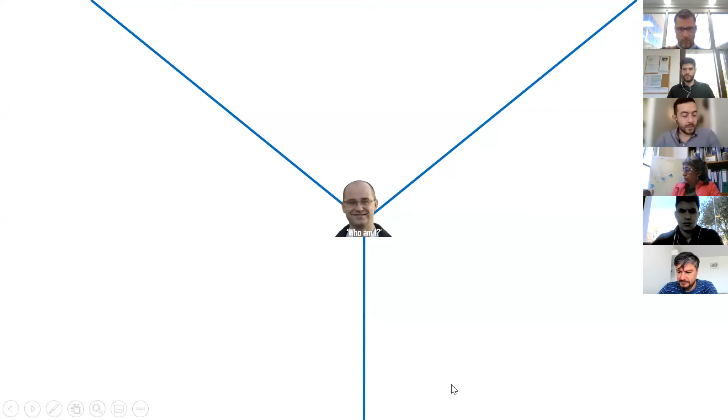I like to introduce myself basically by 3 components that always come back in my work experience. First of all, one of the main things that has always defined my career is that I'm trying to do research and science in support of decision-making in practice. This has actually been the topic of my own PhD work already, several years ago, but that has always stuck in my daily practice. While I'm addressing, at the moment, mostly ports and waterway related problems, there are 2 running components that seem to always come back.

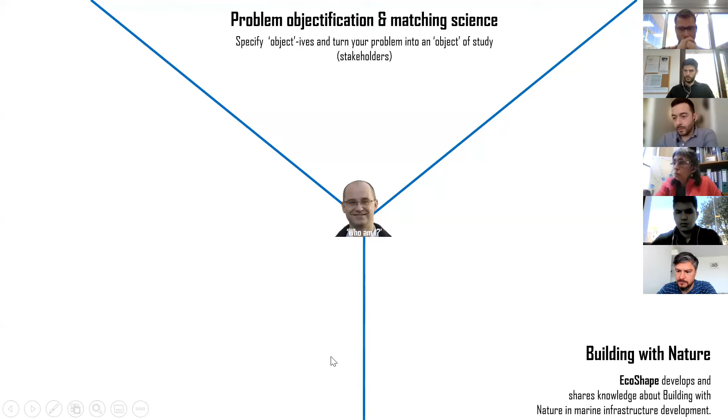One is, let's say, a sustainability part. I was heavily involved in the Netherlands in the Building with Nature program, where we look at promoting nature development around infrastructure projects. I've also been quite active in looking for introduction of digitalization and data science type problems into this. So to go back once more, my own PhD was on this topic, and there I developed a schematic way to match clearly defined problems with quantifiable quantities that you can actually quantify using data or with a simulation.

I'm hoping at the end of this lecture you will find that I still use this in my daily practice a lot. And if you look at Building with Nature, maybe you've seen some of these publications. We've worked on method development on how to integrate natural aspects into infrastructure development. But I've also been applying that myself, in the sense that I have worked on developing my own coral breeding laboratory, which may seem like a bit of an odd sidestep. And we've also worked on underwater microphones to keep marine fauna away from construction projects.

And when it comes to more the digitization part, I've worked on methods to actually introduce working with data, models and tools into the field of civil engineering, mainly also inspired by lots of field work that I did myself.

I was very happy to be awarded a National Science Award for that already a few years back. With that, I've really integrated also into my own group here at TU Delft. And recently I've been participating in two large pieces of literature.

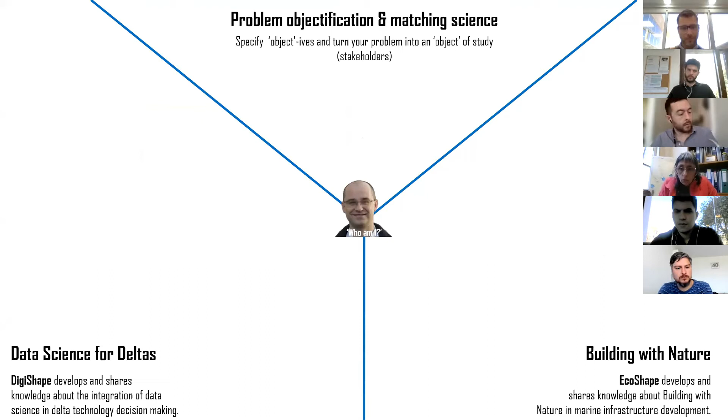Today, what's also quite important is that I am part-time employed by TU Delft as a professor of ports and waterways, as already mentioned, but I'm also still innovation manager at a dredging company, Van Oord. There I'm also busy with all sorts of supply chains over water. So those two different roles are quite well aligned, maybe only differing in scale.

For today, after this 5-minute introduction, I thought I'd spend the first block—I said about an hour, not entirely sure it will be exactly that, but we'll try to time it—introducing you to what TU Delft is doing on the topic of ports and waterways, what key aspects we've integrated into our teaching, illustrated with some master theses completed in the past year.

Then after a brief coffee break, the second block could take you along a few of our research topics. I thought I would illustrate some of the things we do by highlighting three different PhD studies that are currently ongoing in our group.

Then you will get to know our group a little bit, and hopefully by discussing these types of research, you'll also learn a bit about how you can approach the topics we've been addressing in these PhD topics.

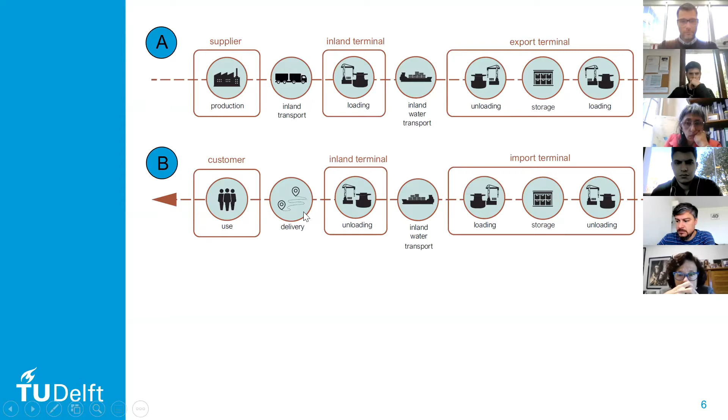There it might be unloaded and loaded onto a seagoing vessel, and then shipped for literally tens of thousands of kilometers to an import terminal where it's unloaded, stored again, maybe loaded again onto inland ships, and moved towards the end customer. This massive amount of trade moving around the world follows basically always a supply chain more or less like this.

And actually this supply chain is not running in free air, but it's based on a solid foundation of infrastructure. So here you see the same type of supply chain again, but from a factory towards either a seaport by road or via inland water transport. Then you have the seaport with long distance shipping, and the same at the end location, from the seaport to the end user location somewhere inland.

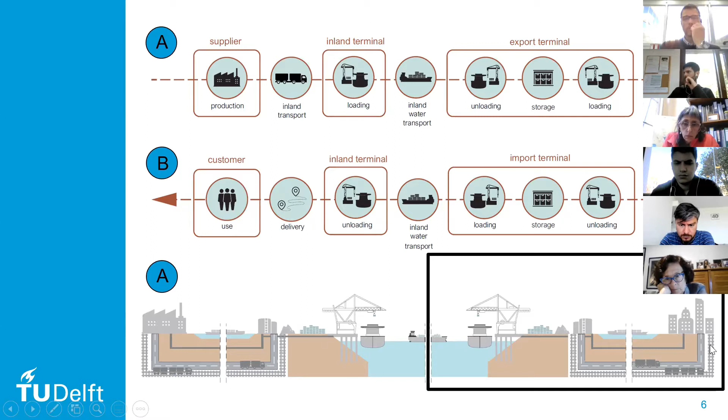Well, if we look at one half of this supply chain and we project it not sideways but more on top, then it could look something like this.

For some reason I have this bar here in front. I'm hoping you don't see that as well, but okay, let's continue.

So here you see the same end stretch of an international supply chain, where maybe from some overseas location A, the cargoes need to go to some city near location B. Large seagoing vessels approach a seaport and offload their cargo, and it goes either via pipeline, rail, road, or inland shipping towards this hinterland location where it ends up with the end user.

The large transport stretches overseas are very important, but they cannot really be influenced that much. It's the large vessels that create this liner trade between an export port and an import port, but the biggest difficulties actually occur when you are moving more inland. Suddenly you find that water depth, limited water depth, or the presence of locks and bridges will affect the efficiency of these supply chains very much.

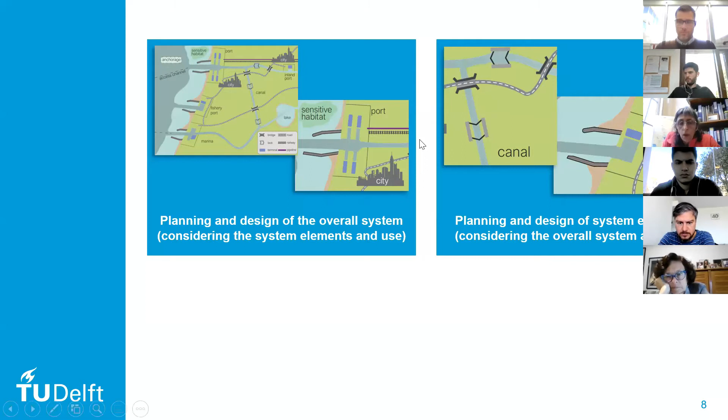So different scales are important, not just spatial scales, but also temporal scales. We look at the long term, where long term is so long that you can actually influence the system. You might be able to dredge a new channel, create a new terminal, or invest in a different fleet, and this is all possible, but it takes a lot of time to actually complete.

And we can look at short-term problems, where short-term is defined as so short that you cannot modify the infrastructure or the fleet composition. You just have to make the best of it with what you have. That typically means adaptation to new circumstances or traffic management interventions to handle new situations.

Next to the large scale and the smaller scale, the long term and the short term, it's also quite important that any port and waterways problems always have multiple stakeholders involved. So it's very important to find an optimal balance between the needs of those stakeholders. What is important from a terminal operator's perspective might be very inconvenient from a shipping captain's perspective.

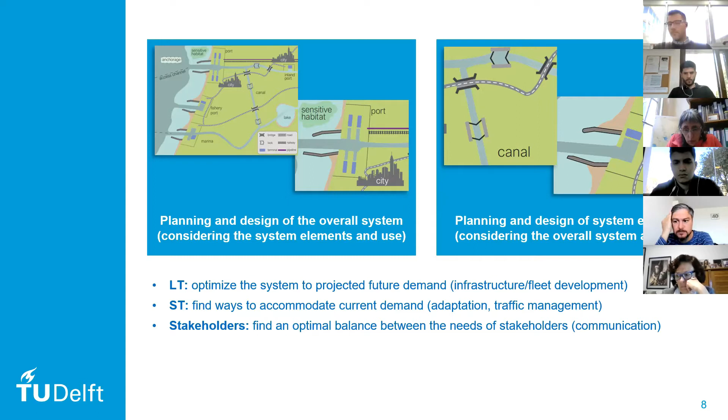To really understand what is the best solution for the system as a whole, you have to be able to show the effects of different interventions to different stakeholders so that you can come to an agreed conclusion. And these systems, you might think once designed there's nothing more to it, but these systems are always under development. In the past decades, we've seen big developments of increasing vessel sizes.

Typically in container transport, we've seen massive size increases. We see also developments in trade where new trade blocks are up and coming, or other trade routes emerge. Things like climate change start to affect these port and waterway systems. You see also an increased focus on sustainability. Some of that relates to climate change and emissions, but sustainability can also focus on natural habitats and so on. At least in Europe, it's becoming very prominent that you see the effects of the energy transition. People are looking for active investments in reducing energy consumption and footprints.

Things like digitalization, so the use of data and communication tools, is increasing, and you see things like autonomous vessels start to play a role. Basically all these things make it so that any port and waterway system is always somehow moving towards a new situation. This explains the title of this presentation and also the title of our book, Ports and Waterways, with the subtitle Navigating the Changing World. So basically how to anticipate and invest in being ready for the future. That's seemingly a never-ending process.

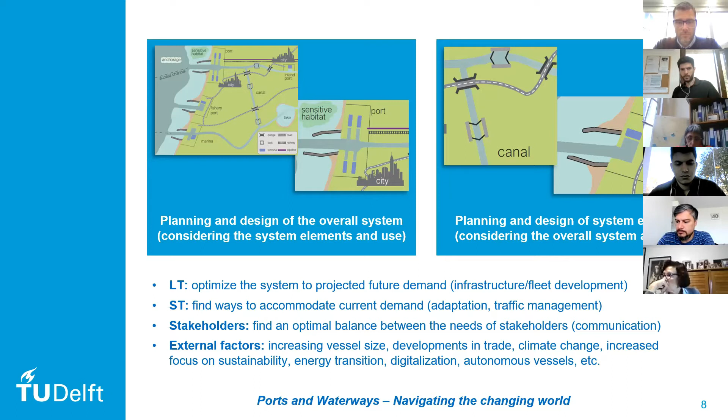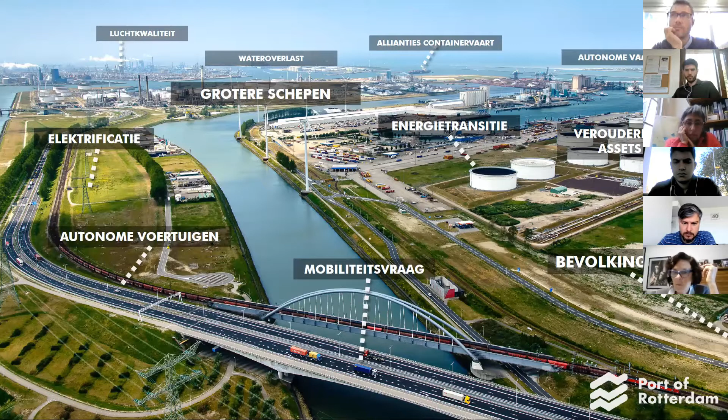So if we look at ports and waterways, what do we regard as ports and waterways issues? We look at the design of port and waterway systems as water infrastructure systems that support supply chains over water. We believe these systems are quite complex to manage because if you change something at one location, it might affect supply chains several tens or a hundred kilometers further in the network. So there's a very complex interaction of things ongoing.

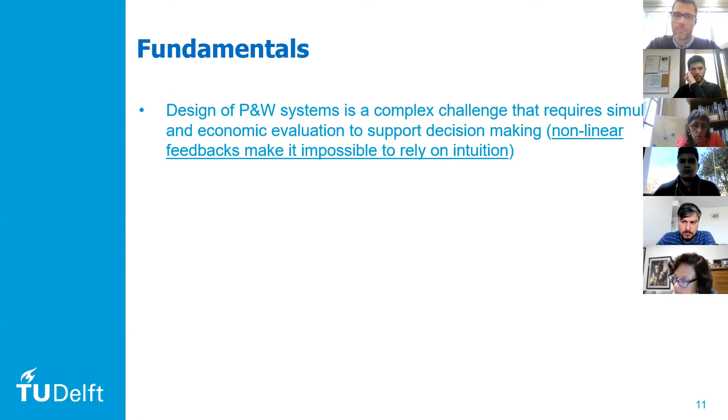To understand this requires simulation, but also economic evaluation. It's not just thinking of one way to improve the way the system works, there are numerous alternatives for improvement. What you probably want to do is understand the cost of certain alternatives, but also explain the benefits. Here again comes this link to all the stakeholders into play. What's also quite important is that many of these feedbacks that cascade through a system are typically non-linear, which makes it very hard to rely on intuition and guess what is going to happen. You really need to investigate to not be surprised. In that complex problem field, we as Ports and Waterways at TU Delft like to focus, as I mentioned, on water infrastructure design.

But to really be able to do that, you need to know about a few other disciplines. You need to know about nautical traffic, the movement of vessels, how they move over the network. But you also need to understand logistical processes, how many vessel movements are needed to get certain amounts of cargo from A to B, and if demand for a certain type of cargo increases, how many more vessel movements can you expect?

You also want to know about environmental and physical restrictions on your supply chain. These can be natural, like available water depth, a typical natural restriction to the performance of a supply chain. But there can also be man-made restrictions, like traffic management rules or environmental restrictions, which might also affect the performance of the supply chain.

Typically, we realize that to understand how these port and waterway systems work, we need to include engineering knowledge from different fields. It's not enough to look at it from a civil engineering or hydraulic engineering perspective. We also need to involve knowledge from, for example, the shipbuilding department to understand energy use, the production of sound or fine sediment spill, or forces exerted on a vessel or on quay wall infrastructure. So it's quite an integral field.

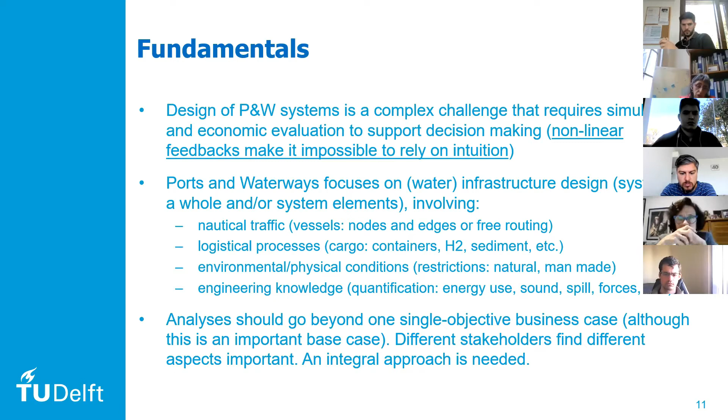And it's clear that we rely heavily for this on data and simulations to be able to quantify. So that brings me to, let me see, now it's moving up, that brings me to a next part of our education program.

We said, okay, it's so important for a ports and waterways engineer to understand that ports and waterways and all the things happening on it are part of an integrated system, that we thought, if we look back at our education material from a few years back, we had separate books and separate lecture notes for different elements. We had a separate book for ports and terminals, separate lecture notes for waterways, separate lecture notes for environmental effects, and separate lecture notes for system performance.

So we thought it would be so much better if we could somehow integrate it into one publication that discusses all these things in a well-balanced way. That's what we spent the past about 2 years of our time on. We spent a lot of effort to try and work out a book of that kind, and it has, as was mentioned by Pablo, been recently published via Delft Open Textbook.

I think you already received the link earlier, but you can just go to this link and download this book, and everything in it has been published under quite open licenses. So it's free for reuse as long as you attribute the original authors and don't use it for commercial purposes. Then it's basically free for you to use also in education programs and other things.

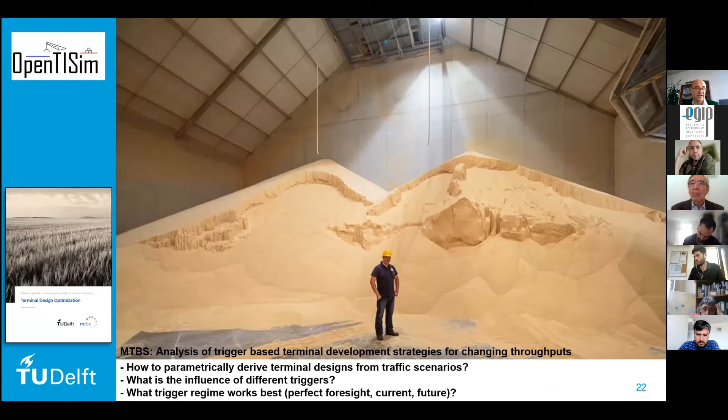So basically, just as I highlighted before, we take a certain supply chain into account. In this case, the topic was agri-bulk type of cargo, where vessels need to transport a certain amount of cargo. Then you can figure out, using all sorts of guidelines, how many quay walls you need, how much unloading equipment is required, and also how to transport from the quay to the storage facility, and from the storage facility to hinterland connections, etc.

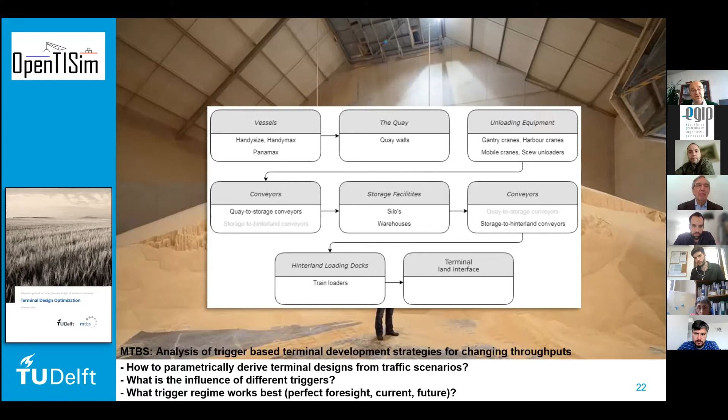So basically, to figure out what the total of such a supply chain over the terminal looks like, there's a bunch of guidelines available. And then we want to figure out how those investments, of course, start at T0, but then also how they can be influenced over time.

So you get a certain terminal at T0, and then if demand increases, there comes a point when certain triggers maybe require you to construct a new quay wall with new unloading equipment, or increased storage facilities, or increase the hinterland connections, and so on. All these investments further down the line influence the cost profile of such a terminal.

So hopefully by having these investments in place, your revenues might also increase. And then if you calculate back what the present value of all those cash flows is, you can get an idea of whether or not this terminal is profitable for a certain demand scenario.

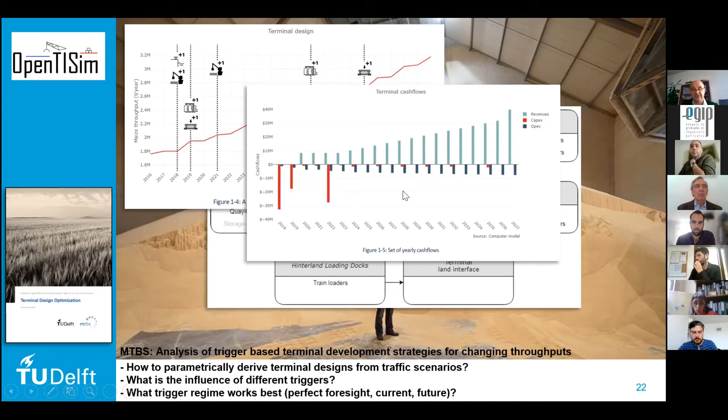And the nice part of integrating this into such a package is that if you can do one calculation, you can do a hundred calculations, if you will, for example varying thresholds of service levels. This way you can explore how different scenarios might lead to different business cases. Well, this is one tool that we have.

Another one is related to what we call Open CLSIM, that's related to complex logistics. In this case, we have cargo that needs to go from A to B, which governs how many vessel movements are actually going back and forth.

And this has been applied, among others, on issues related to low water levels on our main rivers. If you look at the port of Rotterdam, it serves typically a large hinterland with Duisburg as one of our main back ends, but actually further down all the way to Basel, cargo is being transported. One of the things that happened in 2018 was that there was very little rain and water levels dropped dramatically.

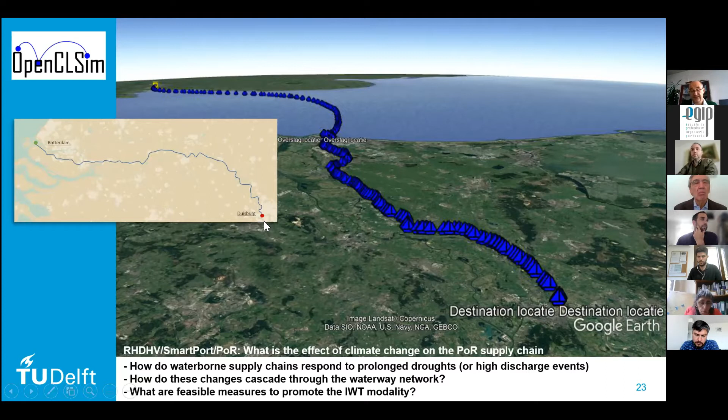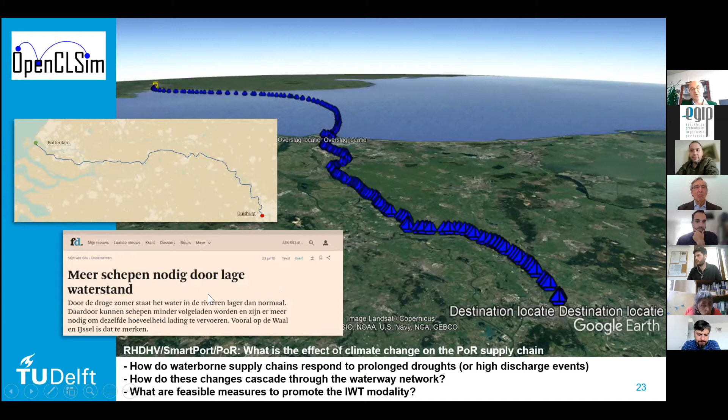As a result, we got news items like this — it's in Dutch, so I'll translate. The news items said that the water levels are low and now more and more vessels are needed. So this is typical interaction between the state of the river and how the supply chain needs to operate.

For that purpose, we developed a digital twin to analyze inland water transport corridors. Later this week, Fedor Baart will hopefully introduce you to this particular digital twin in more detail. But I will just show you some of the things that we looked for in that.

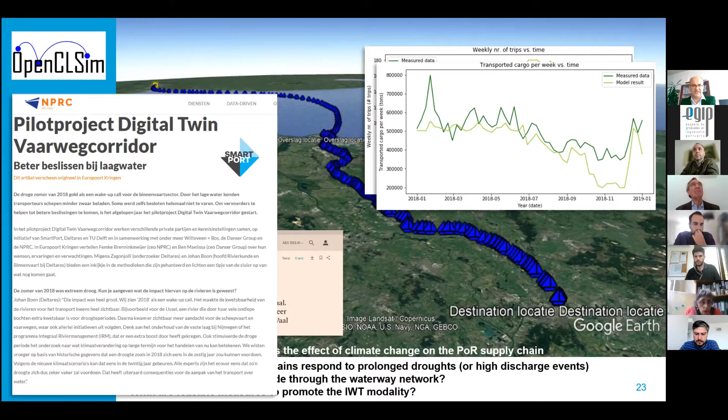We looked at this Rotterdam-Basel route for a given shipping company, and wanted to figure out how many vessel movements were needed to move a certain amount of cargo from A to B. Then with OpenCLSIM, you can run a planning like here.

You see that there is a number of vessels that perform a number of activities. They need to go to the port to be loaded up, so all these are loading actions, and then they are sailing full towards the destination. They are unloaded again, and then they need to sail back and load it again, and so on.

But if you would have less water going down the river—Lobith is here, this entry point in the Netherlands—and if there's less discharge, then the water levels on the river will be lower. With lesser discharge, the vessels cannot load as much cargo as before, so they need a few more trips at the end, and as a result the project becomes almost a day and a half longer.

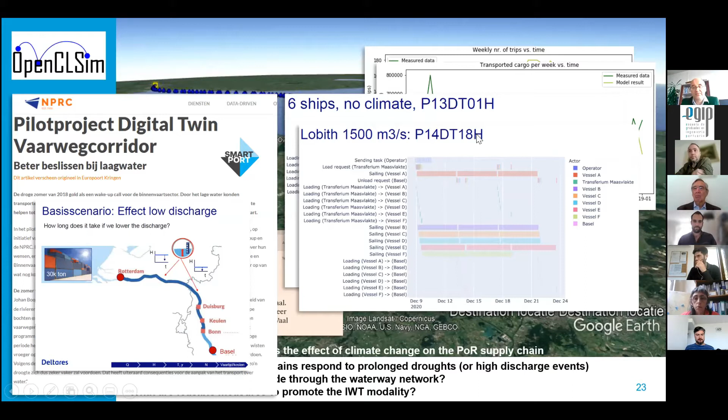If you further reduce the discharge, even less cargo can be taken on board, and the project needs even more vessel movements and takes even more time. So if you do that for a whole bunch of discharges, you can investigate how, with declining discharges, the time needed to transport 30,000 tons of cargo sort of escalates. This is a typical non-linear relationship—as the water level in the river drops, the performance of this supply chain increasingly deteriorates. That's what you want to understand to be able to advise shipping companies or port operators how they should adapt their activities.

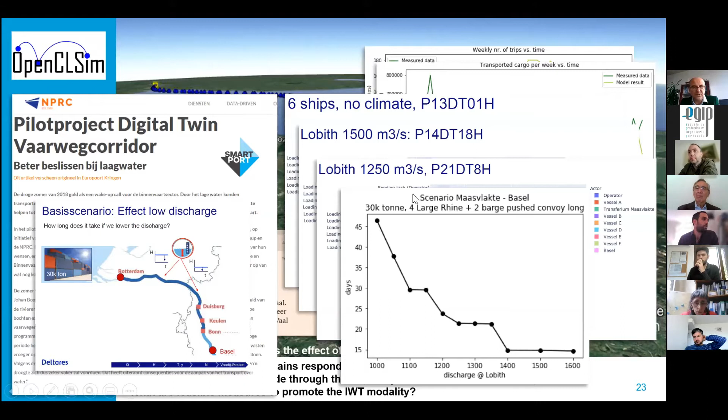Well, a similar type of tool is called OpenTNSim. That's focusing on transport network performance, and whereas OpenCLSIM is driven by cargo transport demand, OpenTNSim is much more driven by actual origins and destinations provided by the user. Then you can let vessels move over a certain transport network, and as they move, you can calculate interesting things.

In this case, we had a student who was looking at estimating emissions or energy consumption from moving vessels. We integrated knowledge on resistance calculations for vessels, based on ship dimensions, sailing speed, and fairway properties, and then you could calculate resistance.

If you know what resistance you need to overcome for a certain speed, you can estimate how much power is needed. If you know for how much time you need that power, you can estimate the total energy. And if you know the total energy requirement of a trip, you can use things like engine age, partial engine load, and emission factors to translate this energy consumption into fuel consumption and actual emissions.

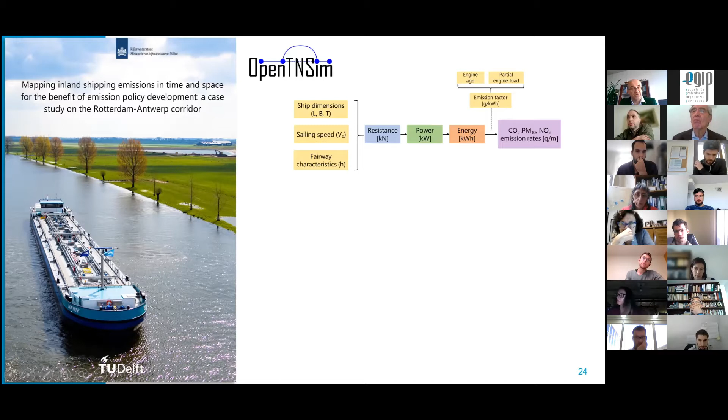We applied that starting with AIS data. AIS data is automatic logging of large cargo vessels to log their position, so you know their position in space and time, and from that you can derive things like speed. If you have that information and know something about the vessel dimensions and waterway properties, you can perform these calculations and come up with emission maps.

If you have these emission maps for the AIS data, which represents an actual situation, you can also implement it in this tool to test different policies. One test was to see: if we have a certain fleet operating on these waterways, what if we replace all engines older than 2007 with new engines? That requires an investment, but what could be the emission gain?

Those are the things that we try to analyze and quantify, and then you get these kinds of numbers back. After the coffee break, I will go into this particular topic in a bit more detail.

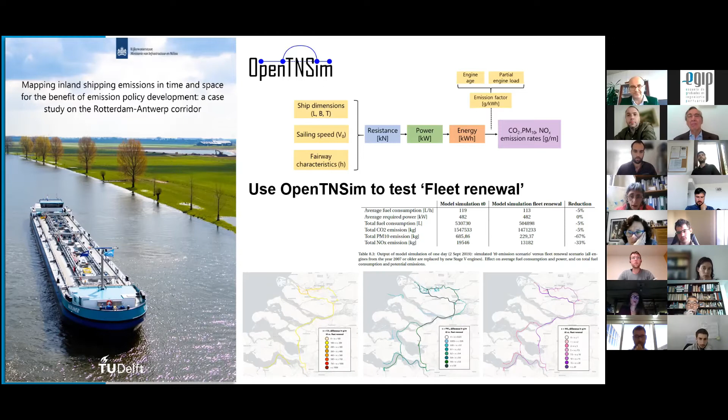The previous tools I described were related to terminal development and vessel movement on the network. A very modern and interesting topic nowadays, in light of the energy transition, is: what if we wanted to import large amounts of hydrogen to a port? How could you analyze the performance of such a supply chain? What's interesting about hydrogen is that it's transported in different forms - different carrier types. You can transport it liquefied if it's really cold, in gaseous form, or attached to a certain carrier. Whichever way of transport you choose, it will affect your total supply chain.

If you have hydrogen in a certain form, you may need to include reconversion plants at some locations. In this study, we tried to figure out the configuration of these supply chains, including things like demand - if demand increases, you get economies of scale - and how distance affects which is the best option. Looking at supply chains from an export terminal to an import terminal to an end user, we applied OpenTISIM for the terminal location and OpenCLSIM for the transport, and for the terminal again, for the transport, and for the terminal again. This way we could quantify how different designs and configurations translate to cost per ton of hydrogen, mapping out different locations and distances to compare supply chains.

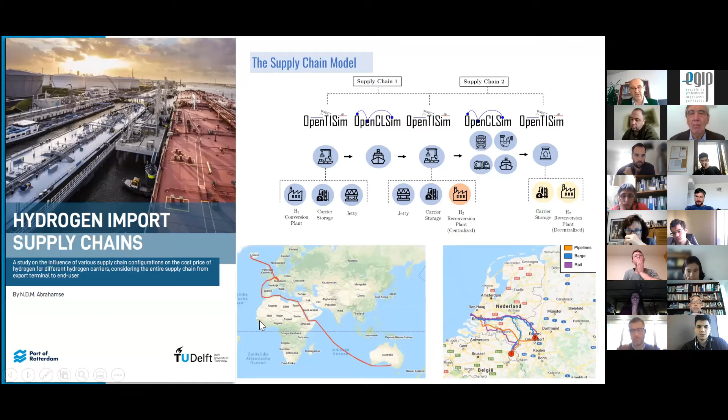That's an interesting overview of some tools we've developed to look at these waterborne supply chains. To move towards a conclusion, for this first hour I thought I'd discuss briefly how we applied this kind of analysis to look at the emission performance of different dredging projects.

If you regard a dredging project as a miniature supply chain, it's also moving sediment from A to B with vessels over a certain route - quite comparable to moving containers over a much longer distance, but simpler in scope. To explain how we analyze such supply chains, I'd like to take the case of Dutch coastal maintenance, safeguarding our low-lying country from rising sea levels and storms.

Every year we apply 12 million cubic meters of sand to the Dutch beaches through dredging operations. This can be done near the coast either by a process called rainbowing, where you jet the water-sand mixture over several tens of meters, or by bottom door dumping - I didn't include a picture of it because it wouldn't show very well. Or you could pump the material via a nearshore pipeline to the coast, where it then had to be reprofiled by land-based equipment into the proper profile.

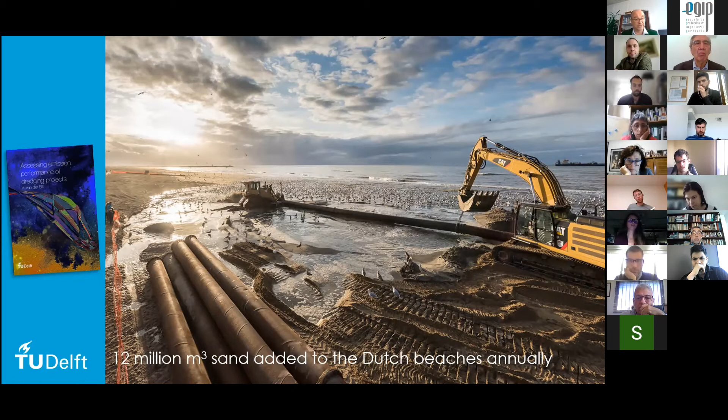One question that came about in the Netherlands, also in light of the Paris Climate Agreement, was: what is the energy consumption pattern and footprint of these projects, and what is possible in reducing these footprints? That's what this student was focused on.

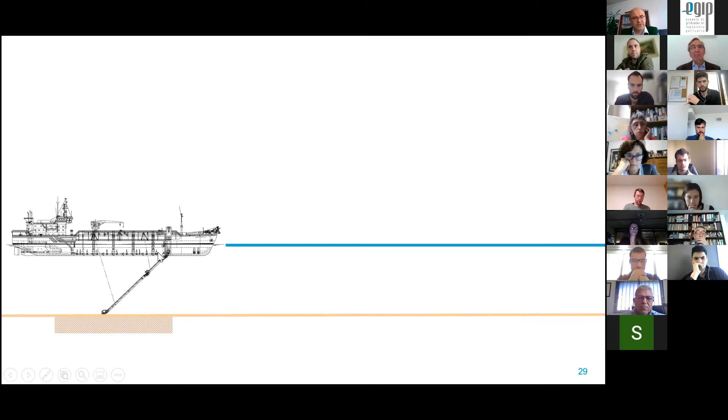The way we did that was we simulated - we decomposed a dredging operation into a series of discrete events, separated events where you can estimate the time of each. With the tools we've developed, this allows a basic agent-based simulation. If you look at a dredging process, the first step is a trailing suction hopper dredger with a suction arm trying to pick up sediment from the seabed, taking material on board, raising the suction arm, then sailing toward a certain location near shore, where at some point it cannot approach further due to restricted water depth.

Then it needs to pick from a few options available for releasing the material. One option is what we call in the Netherlands shoreface nourishment, where we basically place the material by bottom door placement on the shore face. But there is also an alternative: beach nourishment, where you really want the material on the beach.

Well, then typically you would need a floating pipeline to actually get that material to the beach, where you can then reprofile it with land-based equipment. But pushing through a pipeline requires much more energy than just opening the bottom doors. So what ways are there to calculate the energy consumption?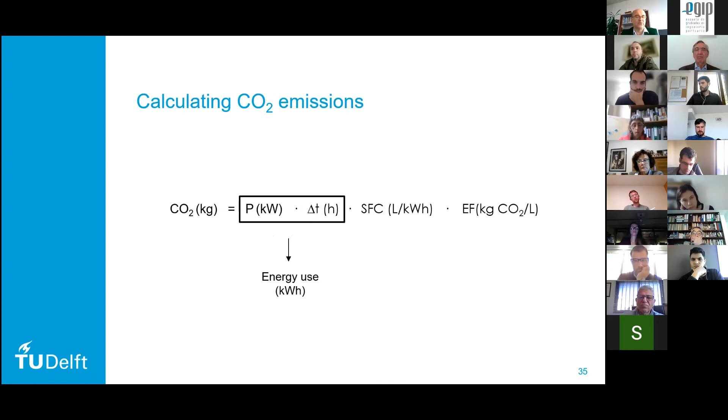Basically, almost any marine energy estimate calculation follows quite a similar route. Step one is that you want to understand how much power is required for different phases of this particular process, and also how long this power is applied. If you know this for each phase, you can estimate the energy use of an individual discrete event. If you understand the energy use, you can translate it to the required fuel needed to deliver this energy. And if you know how much fuel is needed, you can use emission factors to estimate the amount of CO2 present in this fuel that is being consumed.

So this is actually quite a common way to estimate emission footprints of all sorts of nautical traffic. After the coffee break, I will go into a little bit more detail for inland shipping on how we have a PhD who's looking at this. But what is peculiar of dredging projects is that actually a lot of power goes into the dredging and placement phases, so that's why I've decided to highlight it for now.

So if you want to estimate these different energy consumptions, it helps to look at different phases, or first at the different power sources that are on board.

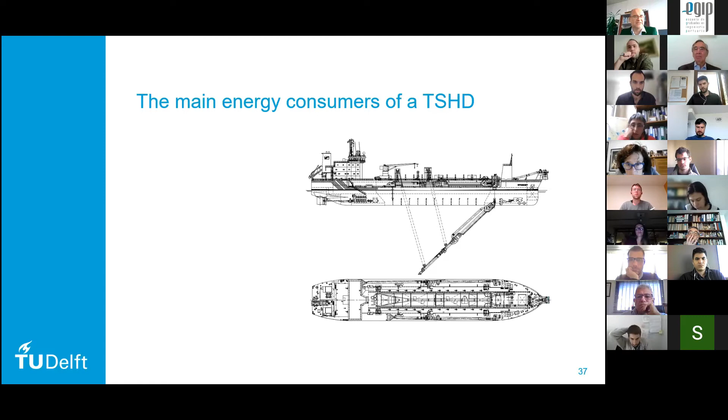So if you look at a hopper dredger, you can identify dredge pumps that are needed to create vacuums and suck the material from the seabed to get it into the hopper on board. You probably will need propellers to navigate the vessel, either sailing full or sailing empty, but also during trailing, where you want a certain speed forward. You need jet pumps to jet water into the soil to release the material so it can more easily be picked up. And you need bow thrusters to do more detailed positioning.

So if you have a vessel that needs to connect to a floating pipeline, you need to make sure it stays in position. And you have the more regular board net or hotel power, basically the power that is almost always on for the lights and navigation and so on. So these components form the energy consumption of a trailing suction hopper dredger.

So it will be interesting to look at these different phases or discrete events, to see which of these sources are actually used. If you look at the dredging phase, then you see that all these sources of energy consumption are basically being used, except for maybe the bow thrusters.

But if you go to the sailing phase, you typically will only have the propellers operating to create sufficient forward speed, and of course the board net, because that's always on. Then if you look at placement, you might need your dredging pumps again, and your jet pumps to get the material off board, and maybe also the bow thrusters to stay well positioned at the floating pipeline. And if you sail back again empty, it's mainly propellers.

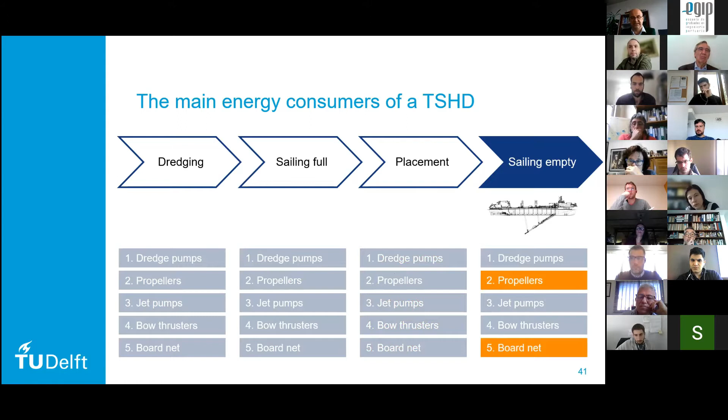So if you know these sources, there are ways to estimate the amount of energy that this requires. For this presentation, it takes a little bit too much to go into those algorithms in detail, but I'm hoping that you trust me that these algorithms can be developed. And then...

You can go and look at different strategies for emission reduction. So which elements are in play? It's interesting to distinguish a number of aspects.

First of all, there's things that relate to the project at hand, so there might be things peculiar to a certain project that trigger a certain energy consumption. There might be policy measures, things in the context of the project established by a local government or so to restrict what you're allowed to do. And then there are operational aspects, things that a vessel operator can control, or a project manager can control, to change the way his project is executed. So typically those first two elements, you could view them as restrictions - they box off the playing field.

So what is given is defined by these aspects, and the operational aspects are the freedom you still have to play around within this playing field and try to optimize.

For these last few minutes before the coffee break, we'll first focus on the operational aspects, typically the selection of work method and maybe the way you operate the equipment. Then we'll briefly discuss project aspects, and hopefully I can show you that these different perspectives should always be viewed together to come up with the most ideal solution. But let's start with operational aspects.

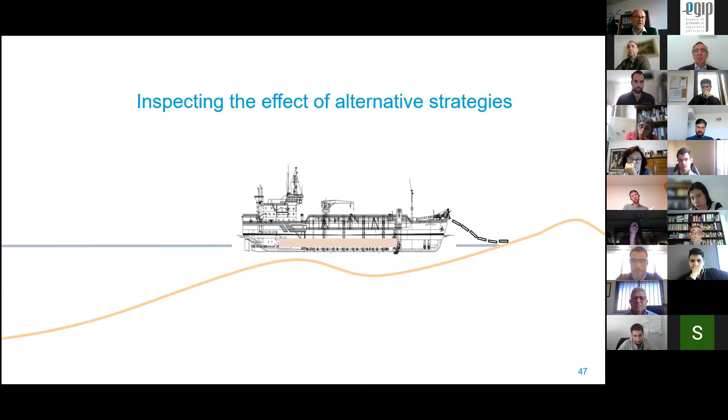An alternative would be to mobilize a different piece of equipment altogether, say a smaller vessel, which can already sail easily closer to shore. But of course, this will require many more trips. So which of these options is better than the other? That's something you want to actually calculate.

So for that, we did a case study - or I must say the student did a case study - looking at a project for beach nourishment by a single hopper, dredging a little over 1 million cubic meters of sediment. It had a site on the beach, a dredging site about 15 kilometers away and more offshore, and a connection point about 2 kilometers offshore of this beach nourishment position.

If you calculate using all these algorithms, which I won't go into the greatest detail about but hopefully you can take my word that you can calculate this, then for each individual discrete event - like loading, unloading, sailing full, sailing empty - you can calculate the energy required. If you aggregate those, you see that a project like this, a little over 1 million cubic meters of sand, will take about 31 days to complete and produce about 5 kilotons of CO2.

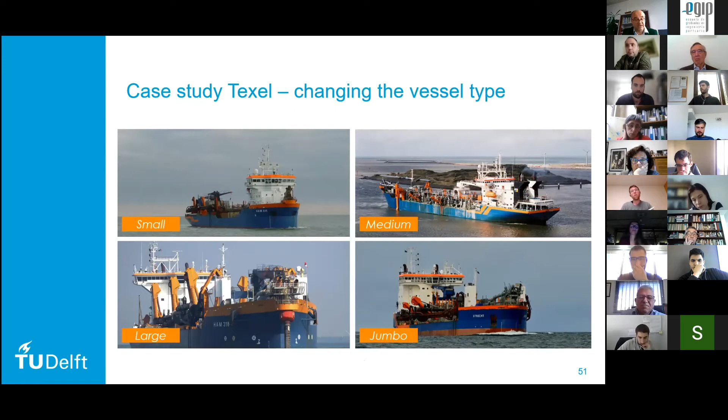Well, then you might want to play with different types of vessels - a small, a large, a medium, or a jumbo type hopper. The larger the hopper, it might require less trips, but it will only be able to approach the shore from a greater distance. So how will this trade off?

But if you look at the CO2 associated with it, you see that it might actually have a larger footprint, mainly due to the fact that it requires a lot of pumping through the pipeline. So depending on what you want to achieve with your project - whether the cheapest project, the smallest CO2 footprint, or anything in between - you come into a trade-off situation.

So also in that way, selection of equipment can be really important. Well, then other things that you can do on the project is changing the vessel speed, for example. So in this case, we are changing only the speed, sailing filled or sailing empty.

Then you see that, and probably you know, if you look at the resistance a vessel is experiencing, the larger the speed is, the larger the resistance is going to be. So this larger resistance requires more fuel and thus a greater CO2 footprint. So you see speed causes an increase in the footprint.

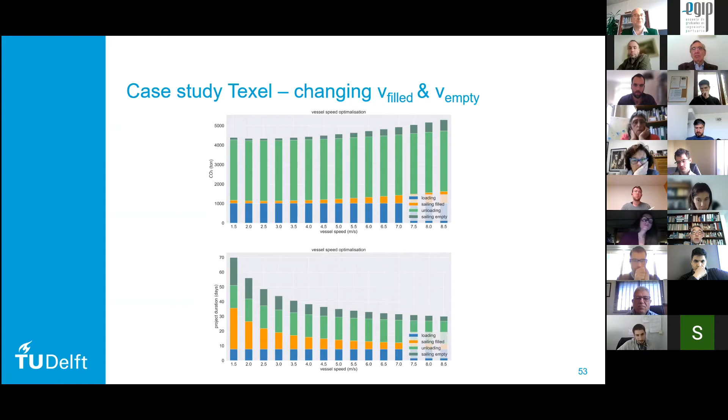So if we then take the reference case again as a start, you can look at a smaller vessel that already can reduce the footprint quite significantly. Mainly if you look at these bar graphs, because it can approach the shore closer, it will have a smaller distance to pump. So that affects the totals of this particular example significantly.

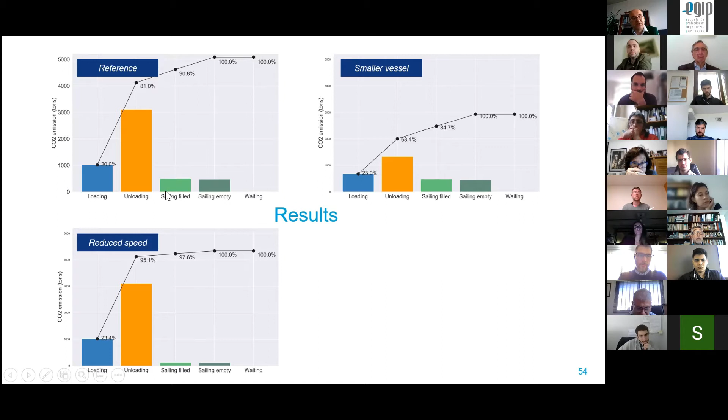But then if you play with the speed, you see the speed reduction from the base case is not extreme. You see it mainly in the sailing filled and sailing empty. These were already not the largest contributors to the overall footprint, so a reduction in those has only a limited effect.

But if you then combine both, and compare to the original reference case, you can achieve a reduction of about 50% in CO2 emissions. But you will probably pay for that with a much longer and more expensive project, right? But this is what you want to be able to trade off.

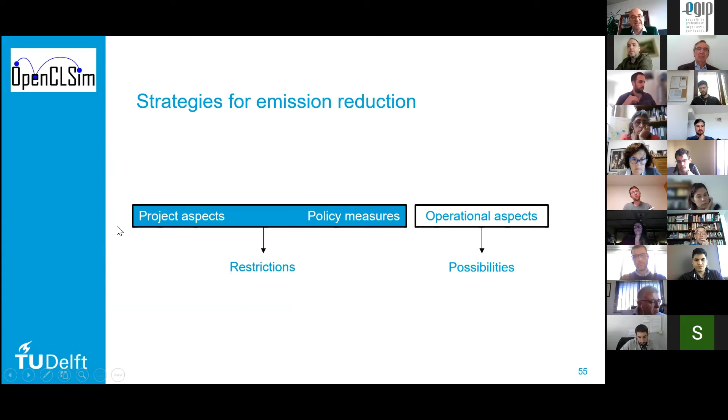Well, then we go to the other section of this problem, and that is if you look at what can, let's say, the project proponent or the government maybe do. So can they change some of the restrictions perhaps?

If we look into that, it's interesting to note that the location of this offshore sand mining location is by law required to be outside of the -20-meter depth contour. This is because the Dutch government is trying to keep the Netherlands strong against sea level rise. So it would be quite counterproductive if people would be mining sediment basically in the foundation of our country. That's why they said the edge of our foundation is located at this -20 place.

So this is a very sensible thing to do, but you could maybe also wonder, is -20 the holy number, or could -15 also be an alternative? I'm not saying that one or the other is true, just that if you want to investigate, you could do that by modifying this dredging location. Let's assume you could take a location around -15 rather than the -20. Then the mining location would become much nearer by, so your sailing distance would be reduced.

Another thing you might do is that for this particular project, it was desired or required to actually do a beach nourishment, so you had to implement this floating pipeline. But what if you could allow application of sediment just near the beach, in the coastal profile rather than actually on the beach? In that case, you would eliminate this energy-consuming transport to the pipeline, and you could place the material in front of the outer bar, for example.

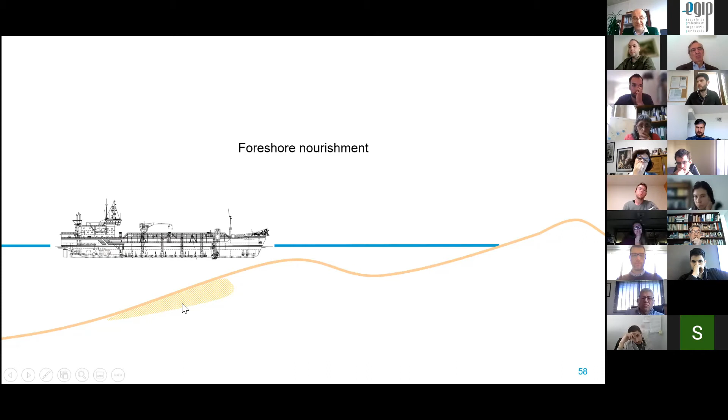If you look at this picture again, you would see that the offshore mining location might come closer by, and maybe you could eliminate the pumping towards the beach. And then how would that translate to results? Interesting to see. If on the one hand we had the operational elements that we could do, that could save about 50%, but would be paid for by a very much extension in project duration. Well, the other part of the equation is to maybe be flexible on some of these items in the project, and that can also have a significant reduction in emission footprint.

And in this case, not at too large an extension of the project. The point I'm trying to make is that to fully understand this particular problem and where there's room for improvement, you need to take an integral view of it and quantify how different alternatives work individually, but also together, so you can find the most optimal combination.

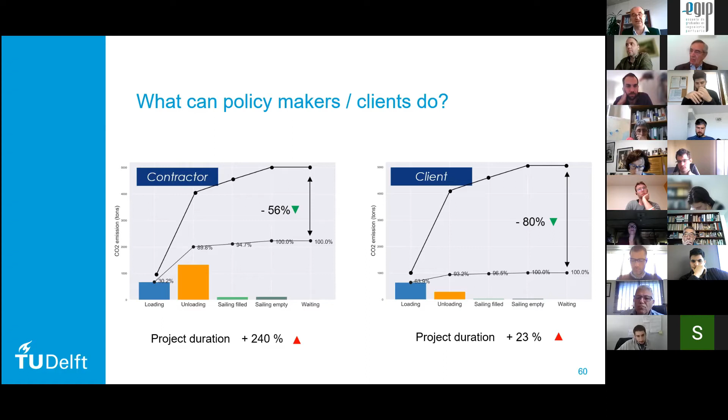So this sort of summarizes that once more. You can see that contractors might modify their work methods in the short term, or invest in new vessels with different types of fuel. They could do that. But clients should also be aware of what they can do with their regulations and restrictions.

Every restriction you impose might trigger or limit certain solutions that could be beneficial. So it would help to discuss this together to figure out the best way to address emission reduction. That can be achieved on board with different fuels, different engines, scrubbers, but also in the projects and even in the policies.

The whole point, from our ports and waterways perspective, is that what we try to do as a university is enable people to calculate all these different components and really study how those trade-offs operate in practice. So with that, I am exactly one hour underway.

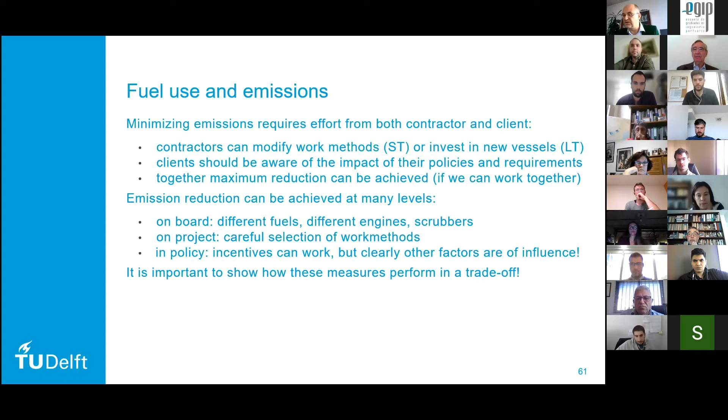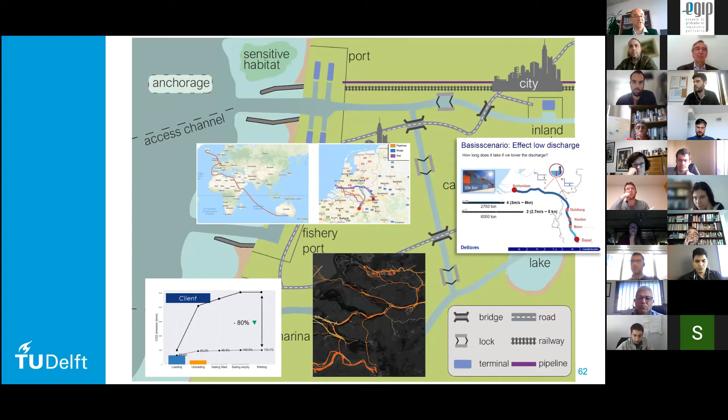This is a perfect moment for a break, but let me briefly sum it up with this overview picture once more. I was hoping you saw that topics like the hydrogen supply chain, the shallow water effects, the emission footprints on the network, or the trade-off in dredging strategies might seem like different elements altogether, but they are all somehow related to supply chains that operate on water, and we see a very common approach in all these problems.

That's why we have developed tools like we did to analyze those. With this, I'm concluding my first hour, where I hope to introduce you into ports and waterways the way we view it at TU Delft, and how that actually materializes in some of these research topics.

After the coffee break, which we'll have to negotiate in a bit how long we take for that, I would like to introduce you to 3 PhD topics that we are currently working on, diving into some of the topics I already addressed, maybe with a little more detail. Then you will know what kind of research we are doing, and hopefully you'll learn a little about those topics along the way.

So with that, Pablo, I'd like to finalize this first hour. Perfect, what is a good moment to reconvene? How long will we take? What do you prefer, Mark? 5 minutes, 10 minutes? Maybe we can do 10 minutes, and people can refresh, grab a cup of coffee. So we would reconvene in 10 minutes, right? So 10 to the half hour. Exactly. Well, thank you, Mark, for this very interesting first lecture, and see you in 10 minutes, all of you. Please stay in the meeting hall or on YouTube, just to keep following us. Yes, thanks. Okay, see you in 10 minutes.

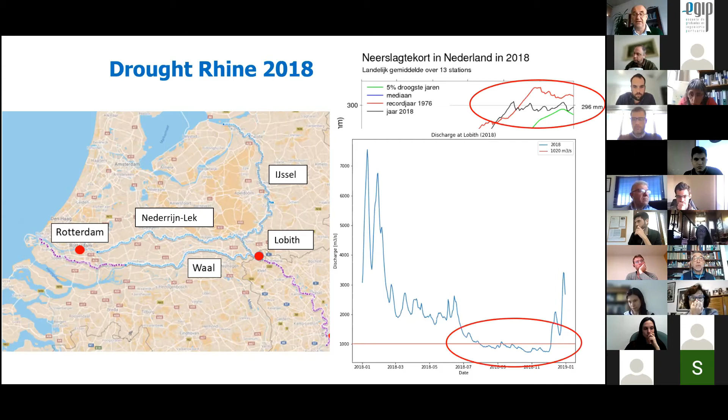At the same time, something happened only a few weeks ago, just before the summer holiday, in July here in the Netherlands. In the normal summer period, which is usually a bit more dry, all of a sudden a massive rainstorm developed, covering not only the Netherlands but also large parts of Germany, France and Switzerland. So much rain fell in such a short period of time that it caused a massive increase in discharge.

That looks like this if you look at the discharge graph. After this rain event, for a few days, the discharges on rivers in the south of the Netherlands increased to levels we would normally only see in winter, and only very rarely, then it took a few days to die off. So compared to the drought, this was a much shorter period of time, but still quite an extreme increase and decrease of discharge due to a massive rain event, which we probably also associate with changing climate. We expect this kind of event to occur more frequently.

If you look at newspaper articles - they're in Dutch but I'll translate - during the drought you saw pictures like this, where the water had receded quite drastically, with very limited underkeel clearance. And here we see that construction raw materials became much more expensive.

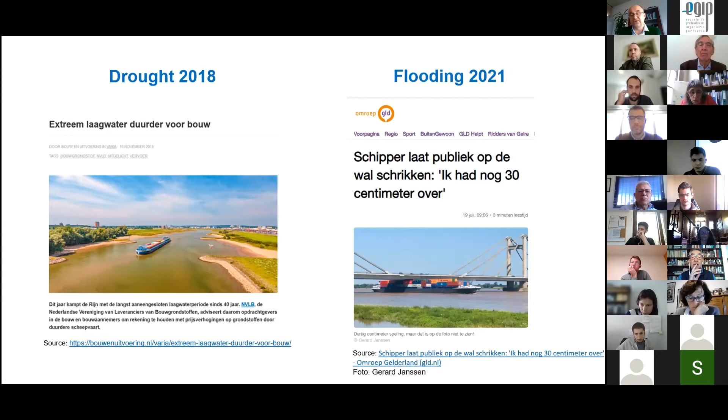But for high water, typically you see that the air draft, the distance between a fixed bridge and the water level, becomes a problem. In both cases, either too little water, so the draft is an issue, or too much water, the air draft becomes an issue. It's still interesting to figure out how those occurrences will affect the transport supply chain.

So for that, this PhD student is looking at how he can relate the status of rivers under the influence of changes in discharge scenarios, and how he can translate that to changes in depth, width, and height, and how that will then affect performance indicators of the supply chains. A number of performance indicators are the number of trips, the total transported volume, and something related to cost.

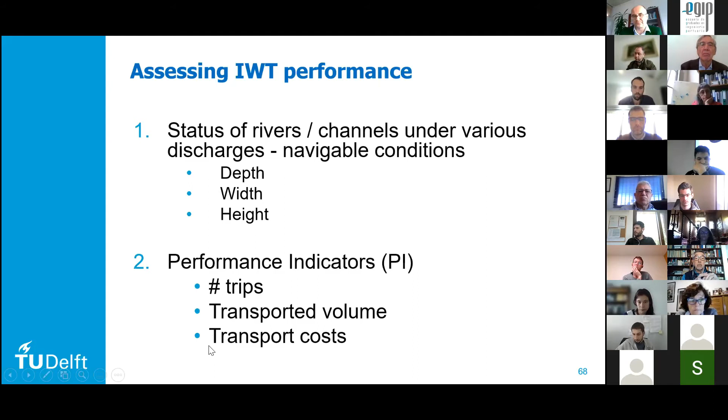So if you look at the effects of discharges on depth and air draft, here you see a schematization. If you would normally have a river cross section, it would have a certain profile. Probably you want to understand how, at a certain water depth which can still be navigated, what the width of the channel is, to know if, say, two vessels can still pass each other, and if there's not enough space, maybe cargo needs to be offloaded to become shallower. That's one of the things we want to understand.

In Delft, we do a lot with hydrodynamic modeling. One of the models we use a lot is, for example, SOBEK, which is a 1D water transport model. It typically solves the 1D shallow water equations integrated in width and depth, but it also has information about the river cross-section all along the river schematization. So if you have a SOBEK schematization of a river, you can know the changes in the water levels, and then with these profiles, you can translate it to available water depth and channel width.

At the same time, you can imagine that if the water level increases and you have fixed bridges, you're interested in the distance between the under part of the bridge and what will be the effect on the maximum loading capacity. So what could happen is that a vessel needs to load fewer containers, maybe remove one layer, to be able to fit under the bridge. Those are aspects of how changes in the water system will affect the performance of the supply chain.

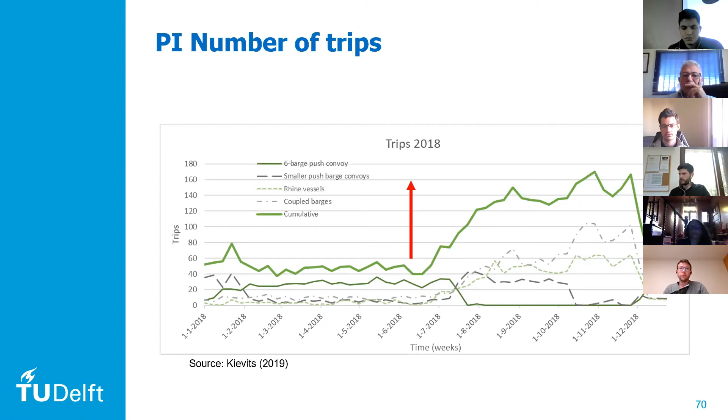The other part that you can get from these counting points is the total amount of transported cargo. For dry bulk, we could see that even though over this period the number of trips would increase, there were more trips with less cargo, and when all summed together, the maximum transport capacity still reduced for this particular type of cargo.

If we translate this to cost, we can see there are massive impacts on transport costs. There were also news messages where, for example, in the German hinterland, steel manufacturers complained about losing fuels and raw materials for their factories. Industry suffered an estimated 4.7 billion euros of production losses, so that's a serious impact.

There are different estimates of what cost should be associated with a drought in the Netherlands in this case. You can imagine these droughts can have quite a big economic impact, and that could warrant the government to look at different ways to intervene. So how can they make the system more robust to climate change?

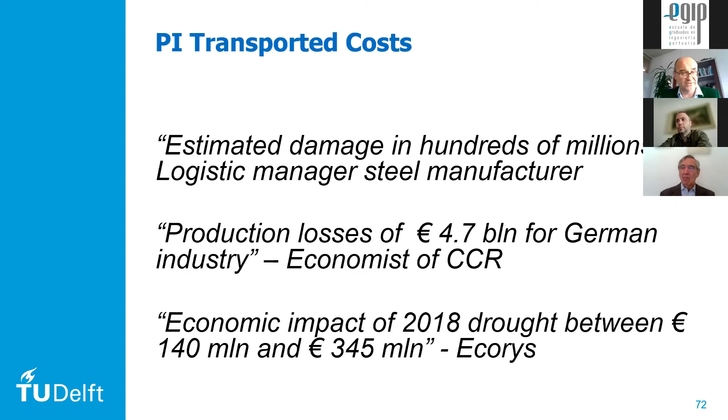For this we used, among others, our OpenCLSIM model to try and reproduce these observations. One of the things we try to do is estimate the transported volume per week and estimate the total number of trips over time. There you see a few discrepancies between what the model says and what was observed.

For example, we anticipate in our model that less cargo is being transported during very low water levels. This can be explained by the fact that we have implemented triggers for reduced loading in our model, which are basically fixed underkeel clearances, like 30 centimeters for sandy bottoms and 20 or 30 centimeters for harder bottoms.

But in practice we see that captains try to load a little bit more than this level, because they believe that by knowing more details about the river, they can find a path that is still navigable. So even though the model says no more cargo can be transported, in practice people become inventive and take more risk or find ways to still navigate the system.

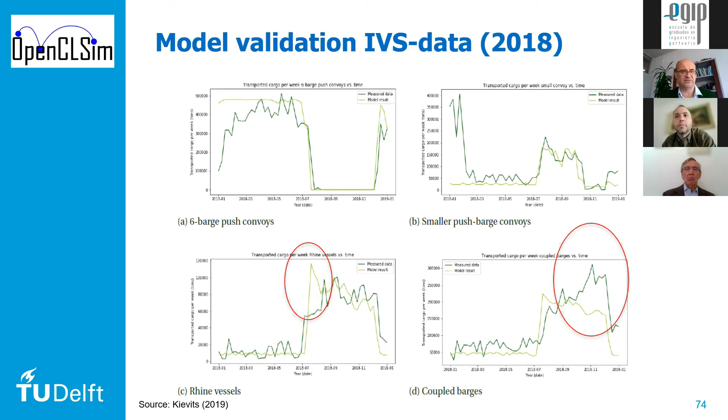So we have a good idea that if we can simulate different discharge scenarios on our river system, we can translate that to how the fleet will change and adapt, and how that translates to more trips or cargo transport. With that, we'll have a tool in hand that allows us to compare different measures, different interventions the government could take to improve the situation.

What kind of things are people thinking of? Well, there's a range of things. You can imagine that if the number of droughts becomes too big, maybe we need to look for ways to regulate the river by creating weirs in the system to have more water depth available, or maybe create side channels.

These would allow for the passing of the lock, but there will be more water available, hopefully, so it might be good for the supply chain. Or shore-parallel dams, that hopefully can keep a greater water depth in the river even with lower discharges. Another option is dredging, to remove possibly a number of bottlenecks in the system. But all these interventions require quite substantial investments, so you need to figure out if it's going to be worth it.

But there are also measures you can think of in the logistics chain. Maybe you can change the sailing regime, so there are more moments in the day where you can fit more trips, if that's still possible. You could also think of possibilities to increase stockpiling - if you can anticipate a period of drought coming, you can transport a little bit more in advance so you have a stockpile as a buffer for the drier periods.

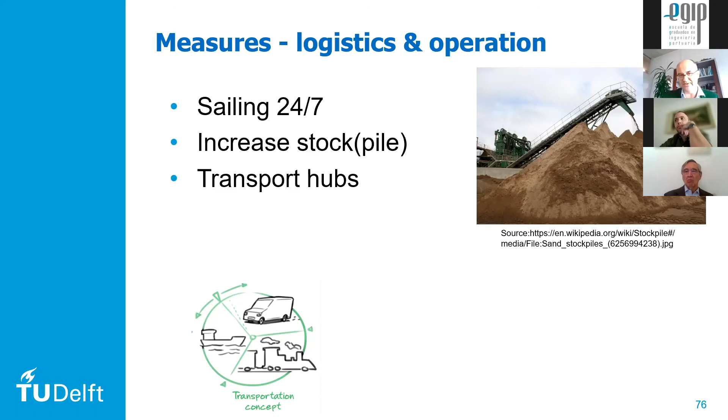Yet another measure is modifications to the vessels. You can apply buoyancy devices next to the vessel so it becomes higher in the water column, or look at ways to reduce the lowest point of a vessel. Typically the propeller and the tube around it can be limiting factors for maximum depth, and some people are looking into different vessel shapes that might perform better at these low discharge situations.

But it's good to remember that even though a vessel might perform better in the extreme situation, it's still a question mark how it will perform during normal situations. So that's again a trade-off you want to investigate.

A final measure you can take is to invest in information services - maybe better riverbed predictions or riverbed datasets that allow captains to have a better idea of how much cargo they can load, predict water levels further in time than we do now, etc.

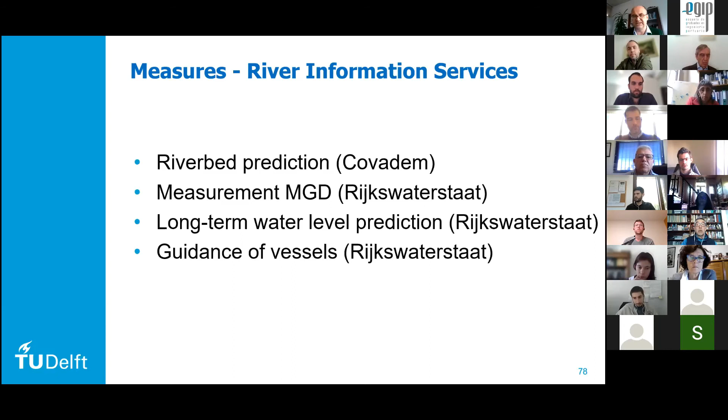I've listed these mitigation measures on one slide, but you probably want to understand how sets of measures together may be the best way forward.

A second PhD I'd like to introduce work about is Man Zhang. She's doing her work on the energy consumption and emissions that follow from waterborne supply chains, with a special interest in the energy transition.

One thing is to know what's happening with current fuel types and engines, but we also want to understand alternative fuel sources - maybe battery electric or hydrogen - and how those settings affect sailing range, since they might have less energy content per cubic meter or per ton. They might not just affect the sailing range, but also the amount of payload you can take on board, since an electromotor might take up more space, meaning less cargo and a smaller sailing range.

So how do such effects translate to the performance of the supply chain? And how could you actually set up a bunkering structure for different types of energy carriers? That's the topic of her research.

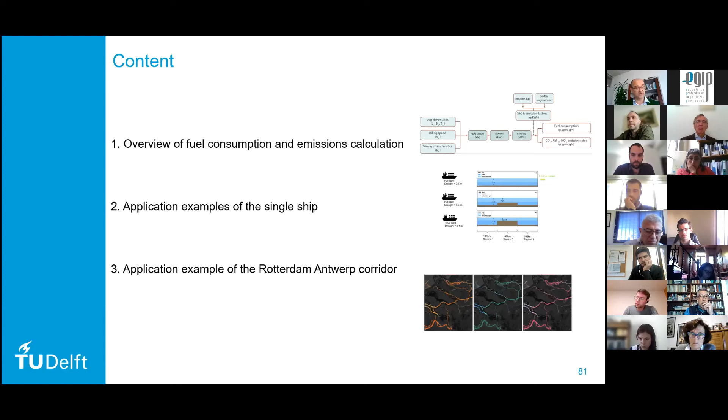So it's just calculating it for each vessel and aggregating the results, but I'll come back to that in a second. If you look at the estimation of energy consumption and related fuel consumption, then basically in our OpenTNSim package, our network simulation package...

We've integrated a bunch of algorithms, partly from Holtrop and Mennen, who defined a method to relate ship resistance to speed and energy requirements, but also some updated research done here at TU Delft to better estimate the effects of really shallow water beneath a vessel, the method by Zeng.

Basically, if you have as input information about the ship's dimensions, the length, width and draft, and you know something about the vessel's speed, and something about a fairway's characteristics, typically the water depth and if there's a current, then you can use these Holtrop and Mennen, Zeng and Karpov methods to calculate the resistance a vessel experiences, and how much power it needs to overcome this resistance.

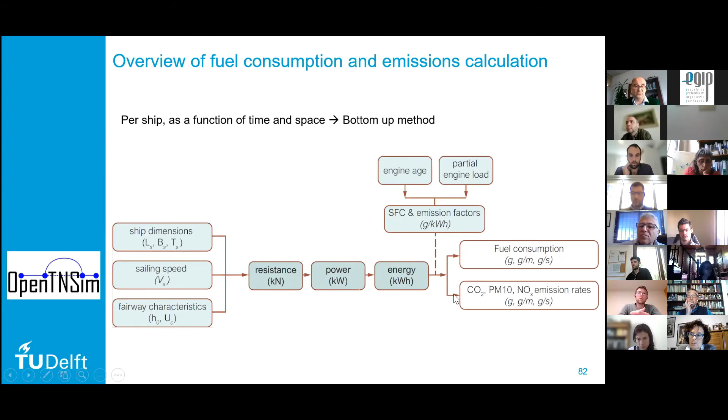And then if you need to do that for a certain stretch of waterway, you can calculate how much energy in total that requires. If you know that, then through specific fuel consumption and emission factors, and properties on engine age and engine performance, you can translate the energy requirements to either fuel consumption or emissions. That's basically how this method works. So I'll get into it in a bit more detail.

If you look at the resistance calculations, we used a very old method by Holtrop and Mennen that many people are probably aware of and use. We've added some more recent algorithms that have been published. Typically Zeng is more recent. Karpov is actually even much older than Holtrop and Mennen.

Basically the way it works is they try to estimate the total resistance from a number of components: the friction resistance, the wave resistance, the resistance related to appendages, and things like the residual resistance. If you calculate that, you'll know the amount of power needed to move a vessel at a certain speed.

But then it's still a puzzle to know how much power you need from an engine to actually have that much power in the propeller. So for that, there are also a number of rules of thumb available where you can go from the effective horsepower needed to go a certain speed.

Then, with loss factors, you can calculate back how that translates to the delivered horsepower at the end of the shaft. And then with yet another few loss factors, you can translate that to the power delivered just behind the engine, the power at the brake, as it's called.

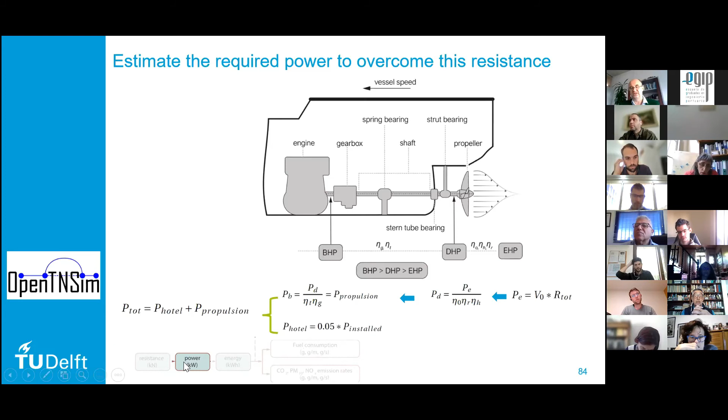And then if you know that, you can figure out how long the vessel takes to sail a certain stretch at that speed. If you multiply the power needed by the time it needs to be applied, you get the energy consumed on that particular stretch.

Once you know the energy being consumed, you can use other literature to translate that energy into the fuel being consumed by applying so-called specific fuel consumption factors. And then next to the total fuel consumption you can expect, you can also calculate what kind of emissions are associated with that.

There are a number of factors we've included. Depending on the engine age, there are different relations between required power and fuel consumed. Newer engines require less fuel consumption to deliver a certain amount of power. Also, if you look at emissions, CO2 has a quite strong relation with the fuel consumed, but especially for newer engines, they are much more efficient when it comes to particulate matter and nitrogen emissions. So engine age is an important factor, but also how this engine is used.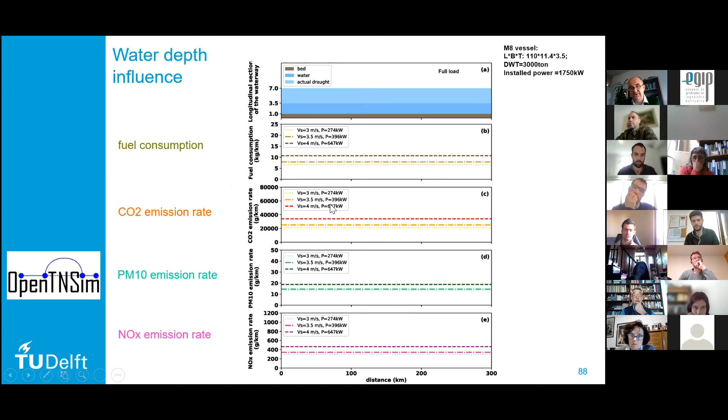So far no real difficulties yet, but what about the next case where you have a shallower area in the middle part. The dotted lines assume a fixed velocity, and the continued lines assume a fixed engine power. If a vessel sails through shallower water, the resistance will increase, so you need more engine power to maintain the same speed. That's what this dotted line shows.

If you try to maintain the same speed but the underkeel clearance has been reduced, you require a lot more fuel. Alternatively, you could keep the same engine power setting and just sail over the shallow water area. What happens almost automatically is that as you experience more resistance, this causes the vessel to slow down, moving slower over the shallower area with the same engine power. Because it takes longer to complete this area, you still see a rise in emissions compared to the undisturbed situation.

Just to show how these routines work - in the third example where it's so shallow that people even need to offload cargo, compared to the previous case, you see that the increased fuel consumption only increases further. So with these algorithms, you can actually quantify the effect of low water depth on the fuel consumption of a vessel.

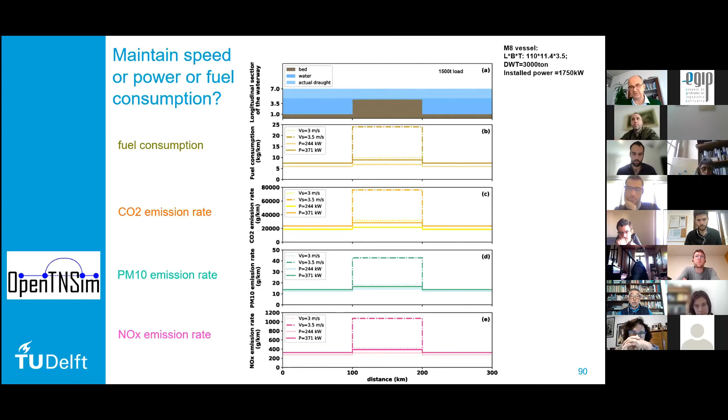Here you can also see what the effects are of engine age influence. We see that as the engine age becomes newer and newer, you see a little bit of a gain in terms of efficiency. The engines have become a bit more efficient to generate power with the same amount of fuel. Since CO2 emissions is almost directly related to fuel consumption, you see that also the newer an engine gets, you see the same trend in CO2 emission reduction.

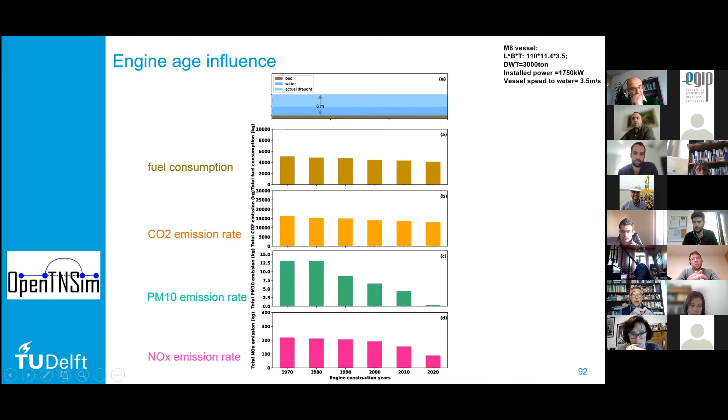Now if we can use this to analyze how corridors work, basically what we do is we just take all the vessels that operate on a corridor, and then for every vessel, we get these kind of logs, basically logging a starting time and a stop time when a vessel is sailing on a certain section of the waterway. You will also know the start and stop location of that particular section.

Then with that, you can calculate the difference in time and the difference in space. So you will know basically the speed that a vessel takes, and then you can translate it to the power that is used and to the emissions.

By knowing this on the different sections, you can aggregate the contributions of different vessels to the relevant sections and then get heat maps more or less like this, where you see, okay, for the current traffic, you will see the most emissions in terms of CO2 at these locations, for example. What is striking here, you see these little dots, and these little dots are actually locks.

What you see is that around the locks, vessels dwell for a longer period of time. They use their engine to a lesser efficiency because they are not sailing at 80% of their capacity. Then you see that you get hotspots of emissions at those locations. So that's something you might want to avoid.

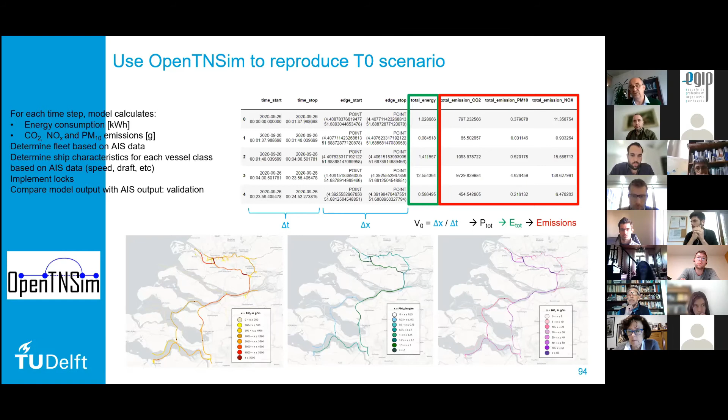So if you can reproduce the T0 scenario from AIS data that you have on the network, then you can also play around with the model to test different policies. You could test if around the locks, particularly the waiting area where vessels are dwelling for a longer period of time, if you would supply shore power there so that people could turn off the engine, how much would you save? Then you can calculate the T0 situation and the situation with shore power. You see that the impact isn't super dramatic.

But then another option you could do is say, okay, what if we would replace all the vessel engines on this particular network that are older than 2007 and replace them with the newest stage 5 engines? Then you get already a much bigger impact. So here you see that the impact on CO2 is not very large, and that's quite explainable due to that picture I just showed, but especially for fine particles and NOx, you see that it actually has a big impact. So it looks like investing in engine upgrades could be a method that could have a lot of impact.

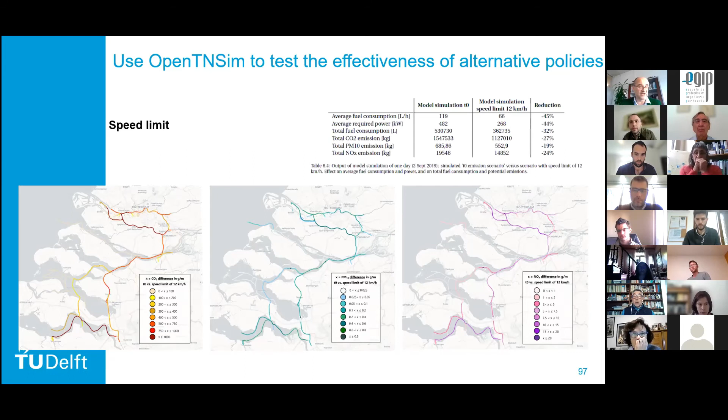Another option could be local speed limits, to see if limiting speed around particularly sensitive areas would help. You see that this also has some reduction effect, but it's good to realize that if you reduce the speed limit, it will also take longer for cargo to be transported from A to B. So it has side effects too, but this shows how you can test different policy measures in a quantitative way using this method. This is work we are continuing, and it looks like a very interesting method to support policymakers.

The final example I want to discuss is work by Floor Bakker. He is a PhD candidate in a large research program started here, where TU Delft is the main applicant, but basically every university in the Netherlands is involved. It looks at the potential for salt intrusion occurring as a consequence of climate change.

We've seen that rising sea levels and changing discharges might actually cause salt from the sea to intrude further inland, which could impact our potential for agriculture, as well as freshwater uptake. To investigate this issue, which will occur not just in the Netherlands but probably in more places in the world, we started the SALTISolutions project. In this project, people are looking at different ways to mitigate salt intrusion.

Floor is focusing on how to translate the effects of these different measures to port logistics. What kind of effects could you foresee, and how can you quantify the effects on logistics of a measure that's positive for preventing salt intrusion? To do that, he looked at two situations. You can hopefully see some reflection of our previous picture of the ports and waterways overview.

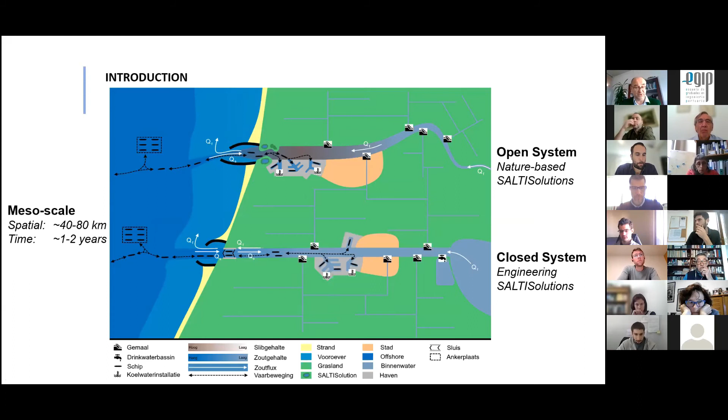Floor is looking at two cases: an open system, where the river is in direct connection to the sea, and a port is exposed to salt wedges entering and leaving. And a closed system, where there's a lock in front of a port complex, giving control over how much salt actually enters the system. Both these cases are of interest.

So for example, we look at port accessibility for these SALTISolutions. I want to show an example that Sebastian Iglesias is also doing his master thesis on. Here we have a port, and in this case it looks remarkably like the Port of Rotterdam. That's not really a coincidence, as this is one of our main case examples, but it should be applicable to other ports as well.

In this particular case, you see that if you have a port complex with terminals, berths and so on inside the facility, vessels trying to enter a certain terminal might face periods where the water level is so low that they cannot access it. This is what we call a tidal window. You can have tidal windows related to depth, but also related to currents, when currents are so large that a vessel cannot make a turn safely because it would experience too much side effect.

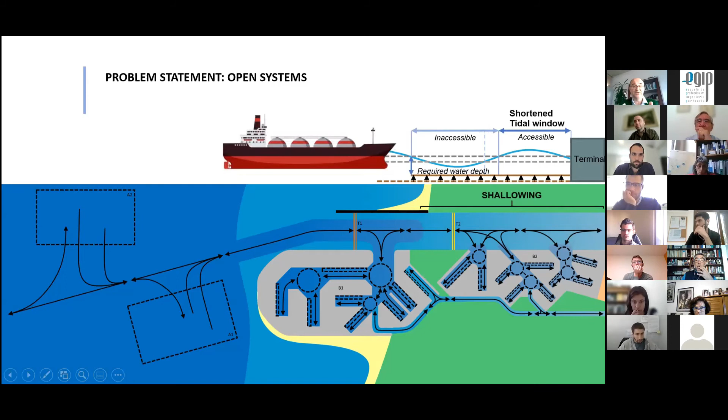One option to mitigate salt intrusion would be to reduce the water depth in this access channel. So if I flick back and forth, you can see here it was quite deep before. What if, for the purpose of reducing salt intrusion, it would be shallower? If you have a terminal here that experiences the tidal window, then you see that it was larger when it was all open, and now, as it shallows, this tidal window narrows—the period with sufficient water depth becomes shorter. That will have effects on traffic intensity, sailing times, but also maybe the number of encounters.

So if the tidal window is shortened, then maybe more vessels want to make use of it at the same time, and that could affect the safety and so on. So these are the things that we try to investigate.

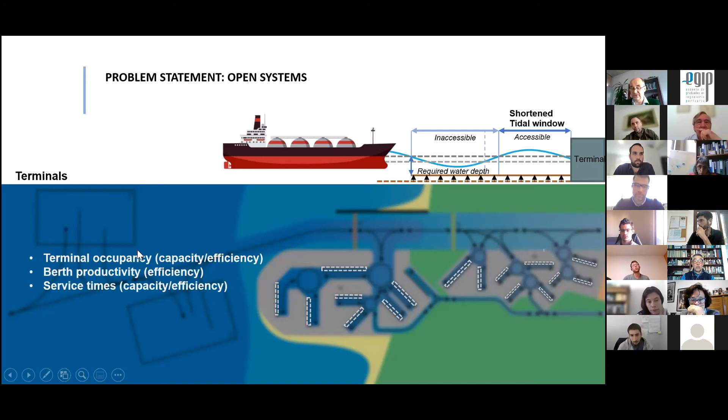And when it comes to terminal performance, you can imagine that smaller tidal windows will affect the terminal occupancy, because maybe the terminal cannot operate since a vessel cannot access in time. But at the same time, a vessel that is ready to sail out cannot leave because its tidal window isn't available yet.

And another thing that might be affected is the occupancy of anchorages. If you have smaller tidal windows, then your queuing will increase and your anchorage areas will be full. That could be the case, so we want to investigate how that works.

And then the second case is related to closed systems, where we basically have a lock at the entrance of a port. That will affect the salt intrusion, but it also causes delays for a vessel that wants to pass it.

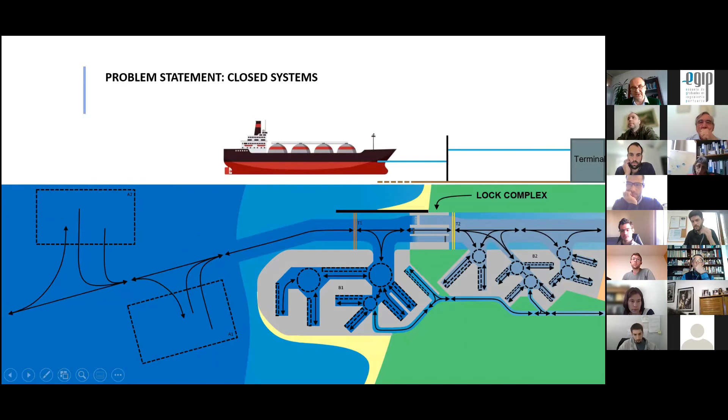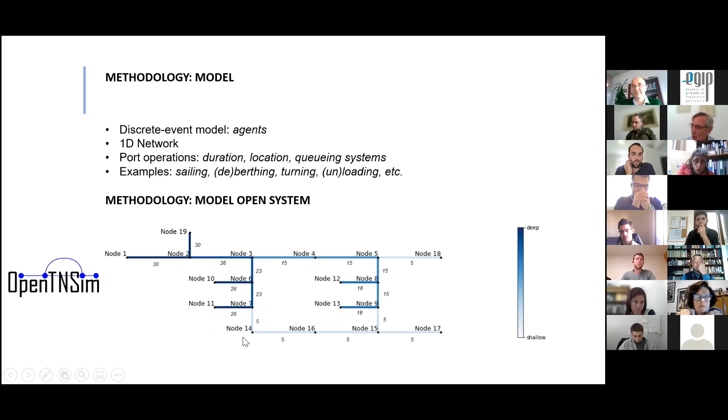If we look at how Floor is going to analyze this, he's using again our transport network simulator, schematizing these networks throughout the port, where you have different water depths and different vessels going from A to B to actually get their cargo unloaded.

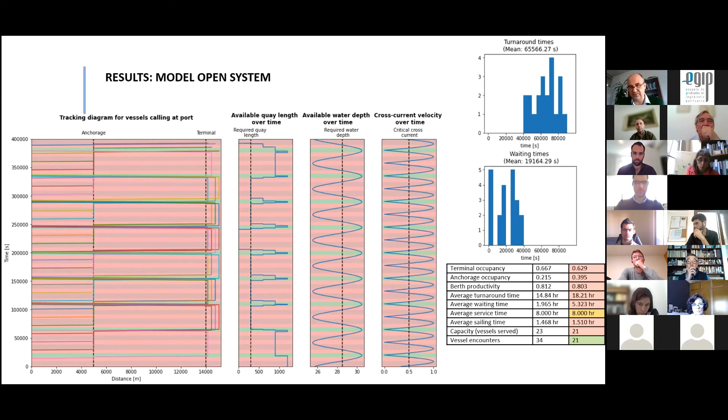So for the closed system, let me see if I can somehow show this.

For me, this is in the view, but I'm hoping it's not blocking your view.

Let's say for the closed system, we're not so much looking at tidal windows, the depth or the current tidal windows, but literally looking at lock complexes. They typically have a waiting area where vessels approaching the lock need to wait until they can enter. If they enter, they go into the lineup area, then move into a locking chamber, wait for leveling to occur, and then sail out again.

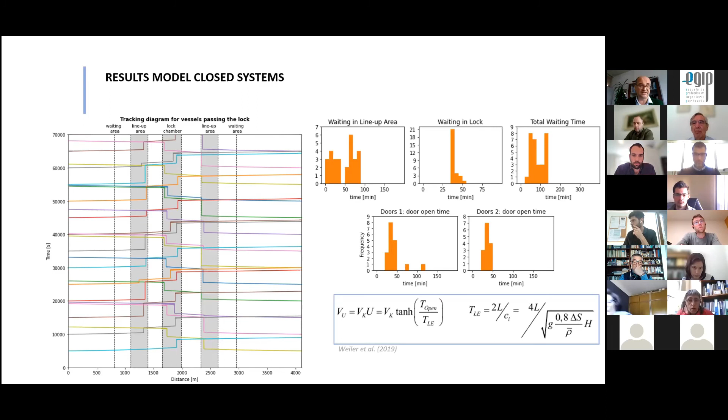Based on the locking process, you can get a source of salt entering the model, but it could also work the other way around. If you only allow a certain maximum amount of salt to exchange, that could cause traffic regulations restricting the number of lockings that can take place. Investigating this interaction is exactly what we can do here in a quantified way, and this is work that Floor is working on.

We are nearing the end of this second hour. Before the coffee break, I introduced what we are doing in Delft for port and waterways, sharing our focus on education, looking at it as an integral system, and focusing a lot on data and coding, illustrated with some MSc topics. After the coffee break, I showed 3 PhD topics currently ongoing. We have other PhDs working on similar topics, trying to take a system approach to quantify what is happening and analyze the trade-off of different measures, the costs associated, and the likely impact they might have. I hope this clarified a bit what we are doing at the Ports and Waterways section, and I recommend you read our open textbook if you want to learn more. That's basically what we are working on at the moment.

I promised also to give the briefest outlook on the next 2 port lectures. Tomorrow we will have our associate professor, Alex Kirichek, who works in our group, and he will tell you something about sediment management and accessibility of ports. It has some relation to the work of Floor Bakker I just told you about regarding tidal windows, but Alex approaches it much more from the sediment perspective.